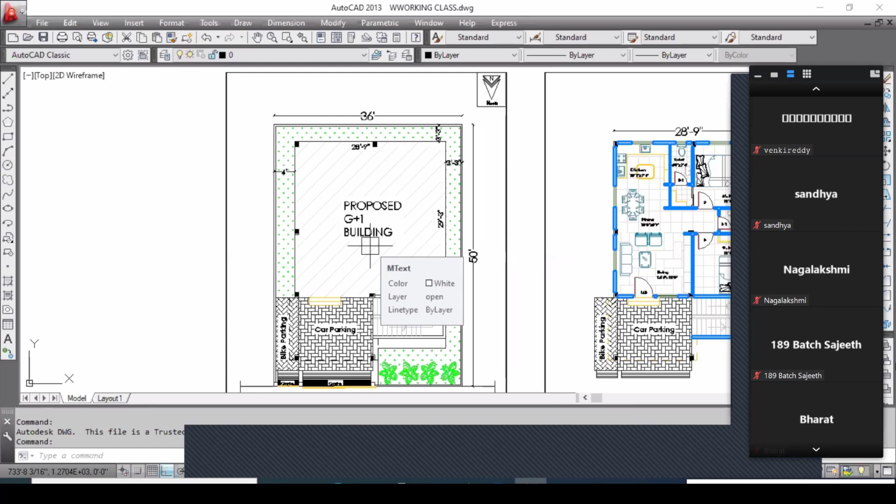That means how many floors, whether he wants parking or not, how many bedrooms he wants, whether the ground floor should be parking, or half the floor constructed as a single room, or half the portion covered with parking or something. We have to collect all this data from the client first, and then decide the setbacks.

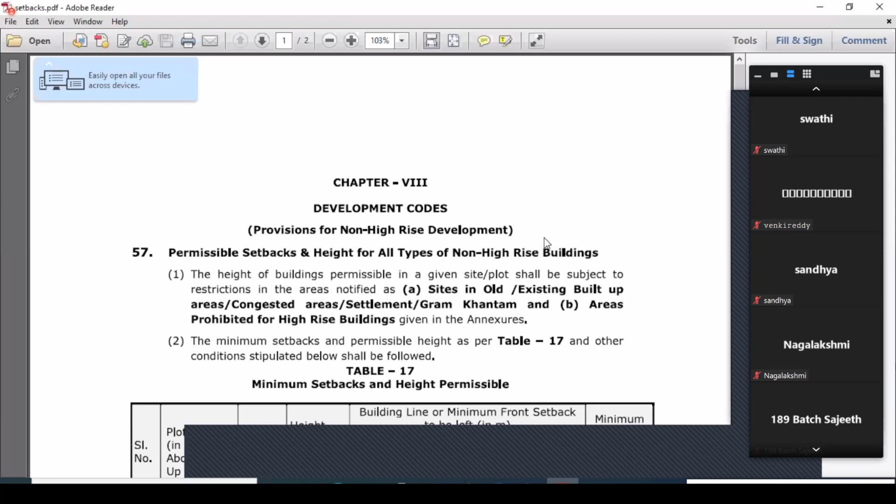I will share something—this is the architectural plan actually. As per our GO119, these are the setbacks, guys. All these units are in meter square. First of all, we all know all working drawings are done in square yards.

Our client easily says he has 250 square yards of his site, or he simply says I have 30 by 40 of site, or 30 by 60, or I have 400 square yards of area. That's it. He wants, and he will tell how many floors he wants - 2 floors or 3 floors, it may be.

These are the government rules, guys. Don't get confused. These rules only come in meter square. First of all, when we take the area, we have to convert it into meter square, when he will go for approval in GVMC circle or any other municipality. These are the areas, guys.

First of all, this is less than 50 square meters. Up to this we can construct - this is the permissible building height - up to 7 meter height only, including the parapet wall. Otherwise we can simply say 3.5 per floor height, we can imagine like that. And this is 50 to 100 square meters of area, we can construct up to 10 meters.

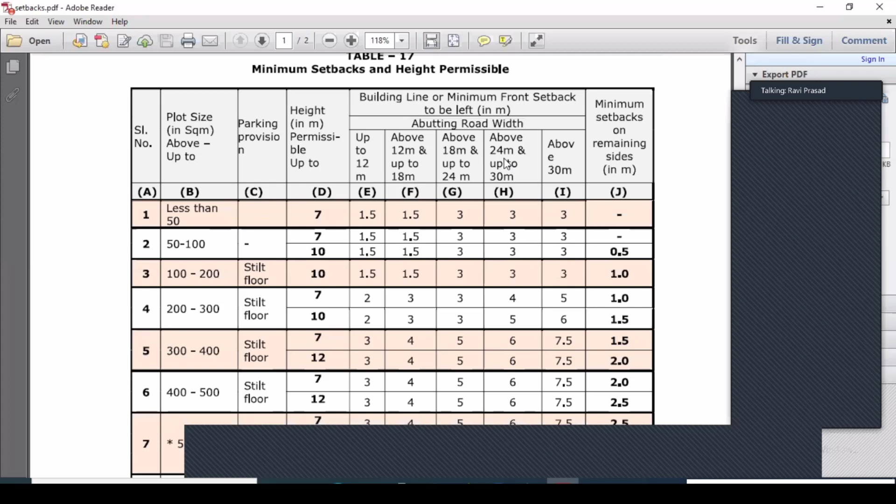These are the road widths, guys - up to 12 meters, or 12 to 18 meters, and 18 to 24, and above all. These are the surrounding setbacks, that means side setbacks.

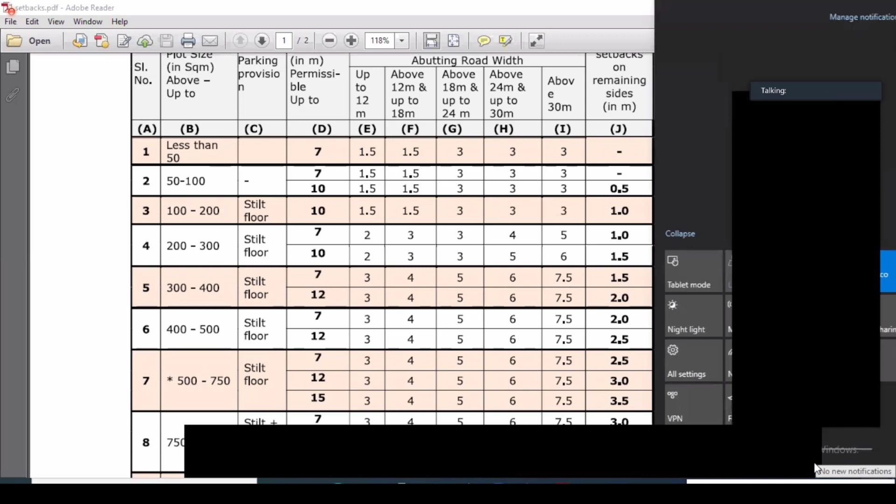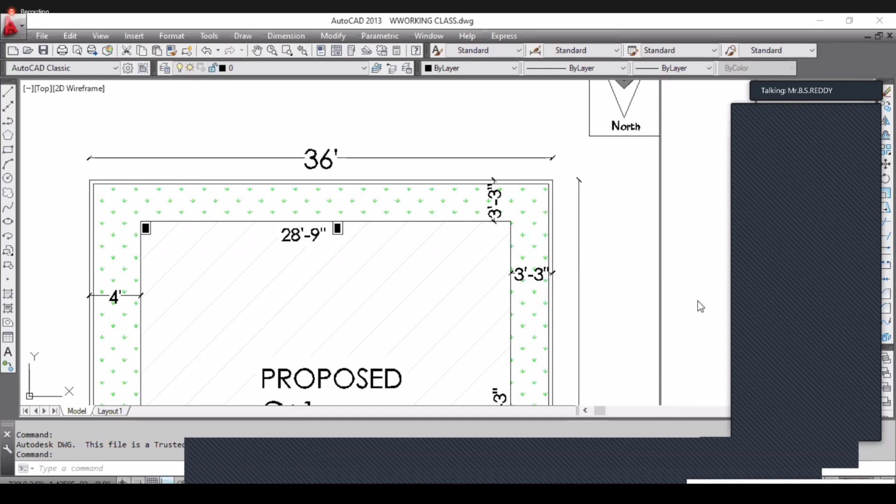I think we are seeing some shadows on that screen. Can you reshare it? Just click stop sharing, then share again. Is it clear now? Still I am seeing that. I don't know why it's happening. Did you open something? Nothing, I only opened the AutoCAD software and this Zoom meeting app. Whenever you click screen sharing, you can see the entire screen option, just check it. I'm already using that. Just share it. I think... I don't know why it is. Anyway, you can go ahead. Thank you, yeah.

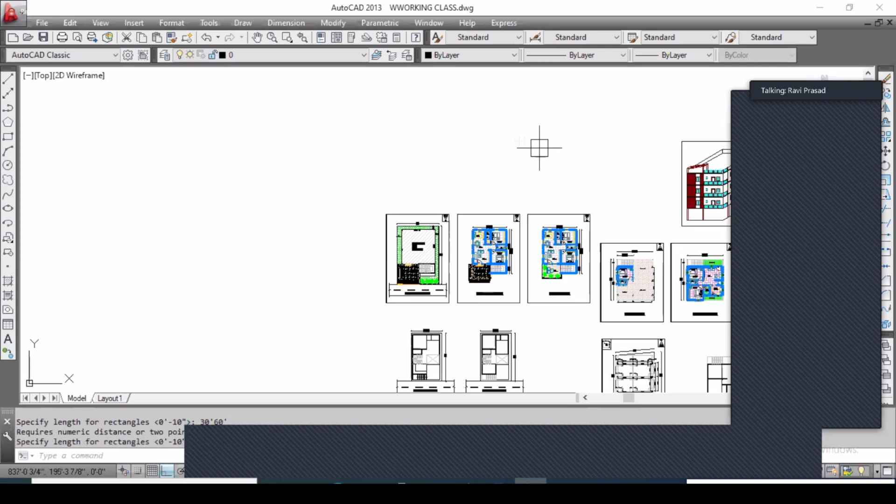Now we are coming for the working drawing. As per the client, we want a double bedroom house. That's it, and he said he wants car parking or something. First of all, I want to tell you all about Vastu. I have a site of 30 feet by 60 feet, I am drawing it here. And he said it is north facing, and he has a road width of 9 meters or something.

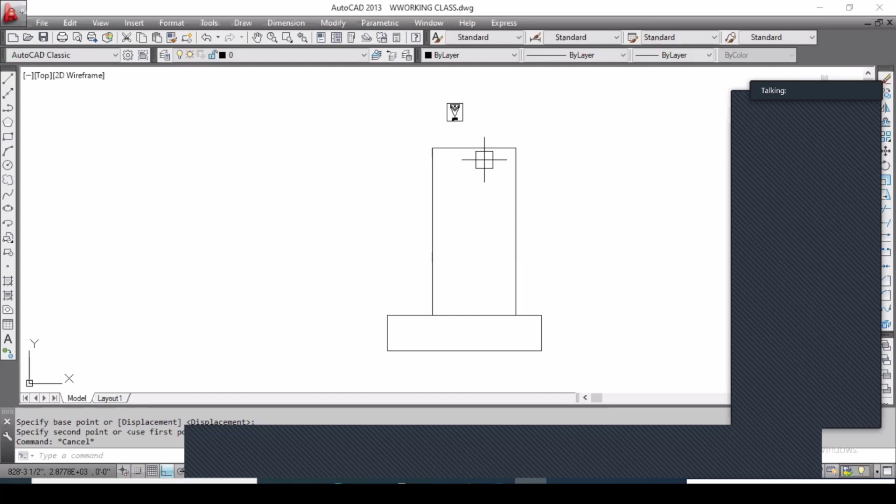Now, first of all, what we have to do is take the requirements of the client - how much he wants. If he wants double bedroom or single bedroom, or otherwise wants an apartment, that means group house, which includes area of each flat of 700 square feet, or 800, up to 1250 or 1300. It depends on the site area, or on the slab. So first of all we will ask the client what he wants to do.

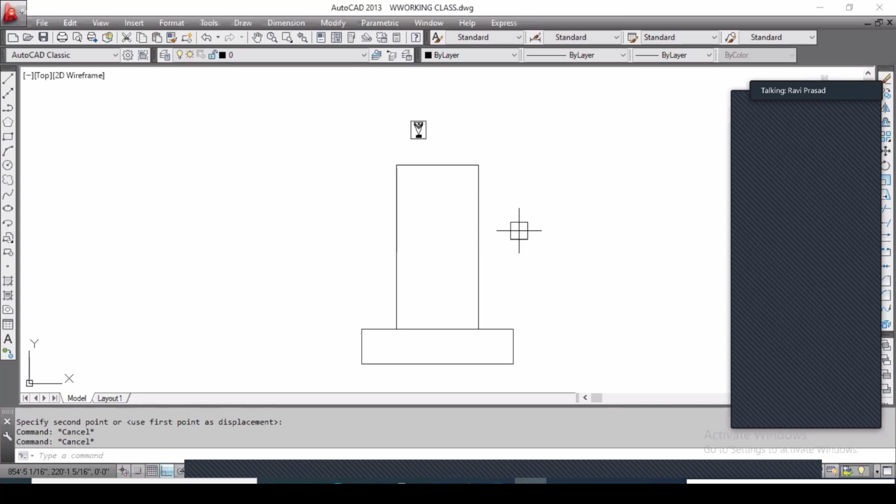He wants to go for plan approval or not. If he wants plan approval, we will take the setbacks as per GO 119, convert into feet, and draw this in the drawing. Otherwise, we ask the client if he wants a deviation. Deviation means, for example, if the site comes under 1800 SFT, I convert into meter square - it comes to 167.28 meter square.

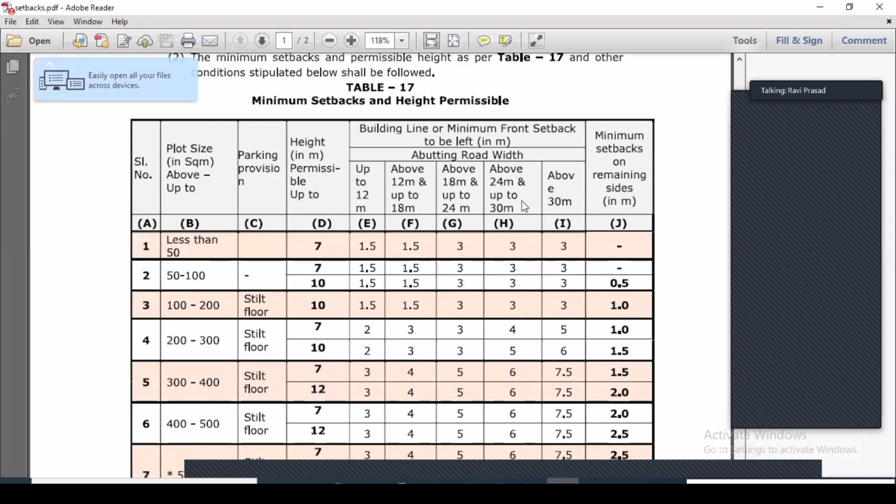As per our norms, if the client wants to take the working plan same as the approval plan, then we take 100 to 200. Our site comes under 167 square meters, so it comes under the third category, that means 100 to 200. We can give stilt floor as parking, the permissible height of our building is 10 meters, and the front setback should be 1.5.

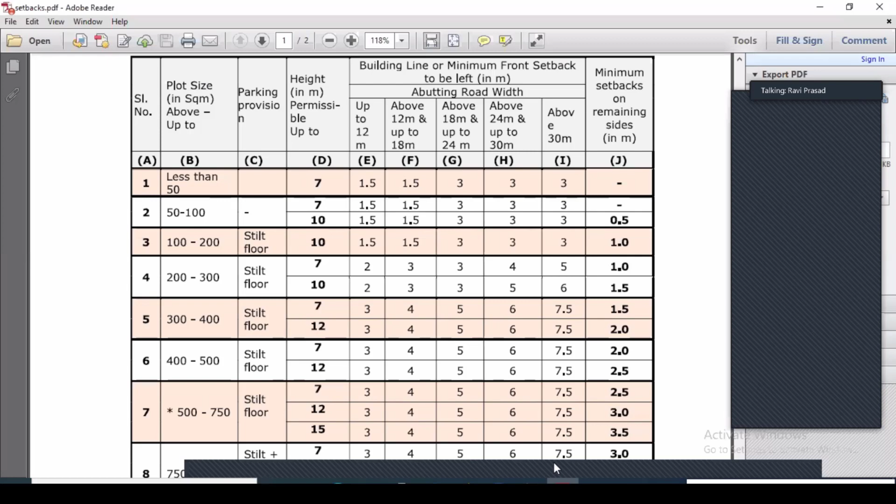It should be 1.5 or more, it can't be less than 1.5. When the road width is up to 12 meters, that means up to 40 feet, the surrounding setback is 1 meter, that means 3 feet 3 inches when we convert into the architectural drawing. These are the minimum. When the client says the same plan he's going for approval and the working plan should be same as he wants, then we will simply do like this.

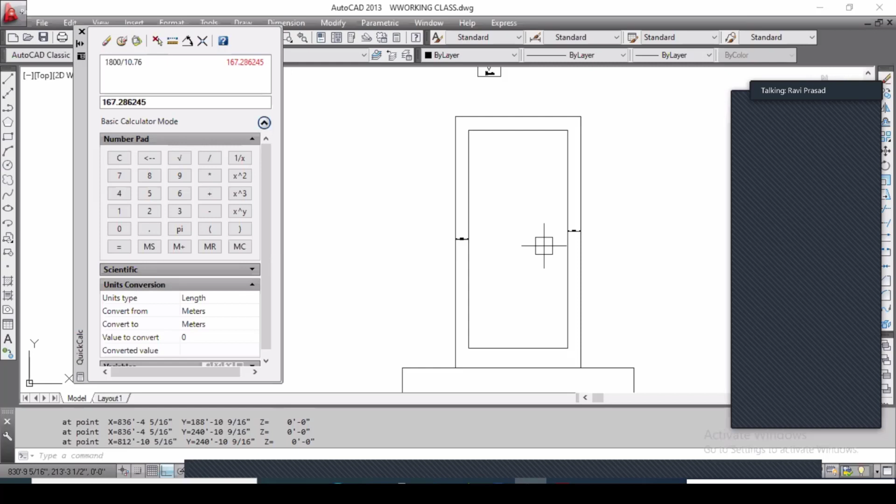One more thing is, then we will go for the slab width, how much slab area we got after the setbacks. So here I got 1200 SFT. Say it as 1200 SFT. So what we can get from the 1200 SFT, that means we can get double bedroom or triple bedroom as per the width that we get from here after the setback conversion.

Now these are the client requirements, these are the first points we have to take. When a client comes to us and asks for a plan, these are the tips or points we ask from the client. I already told you the road width, the sizes of the plot, the facing of the road, the facing of the plot, how much height you want, that means how many floors, and parking or not. That's it. Now we are going for the Vastu.

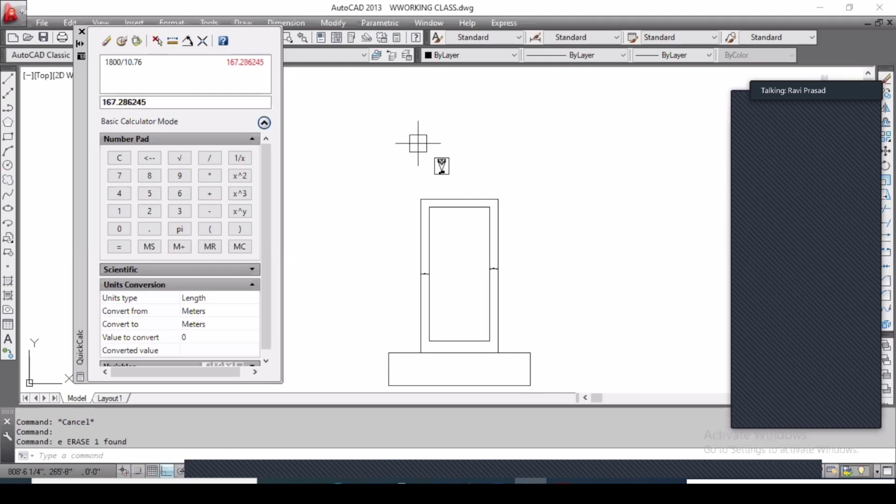This is the north one, and this is the south, and this is the east, and this is the west. At the west I provide 3 feet 3 inches, right? As per Vastu, when we are going for the working drawing, the east setback should be more than 3 feet 3 inches, that means it may be 4 feet. We can provide 4 feet, otherwise if we want more slab, then we will provide 3 feet 6 inches.

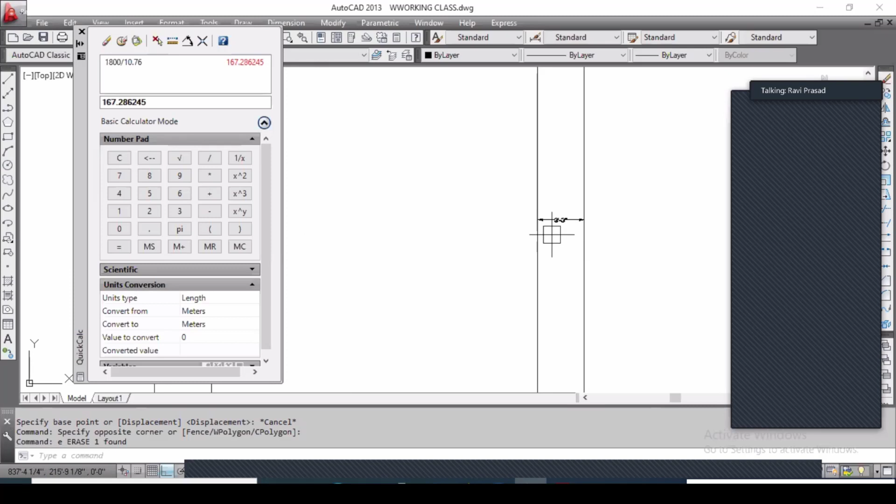Otherwise 3 feet, otherwise we will decrease this one as 3 feet or 2 feet as per our requirement, and we will increase this side more than that side. And the second thing, north one and south one: the north setback should be more than the south setback. When we provide 3 feet as the south setback, we have to provide more than 3 feet for the north setback. As per the rule, we are providing 3 feet 3 inches for the south setback.

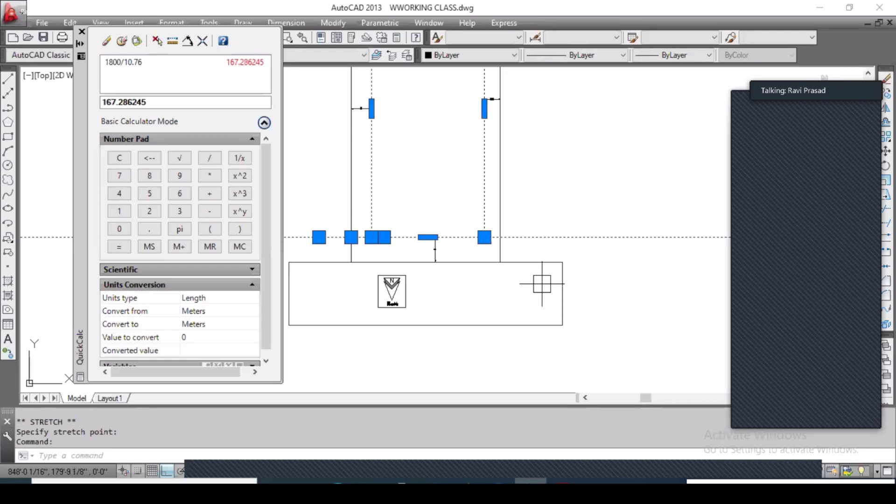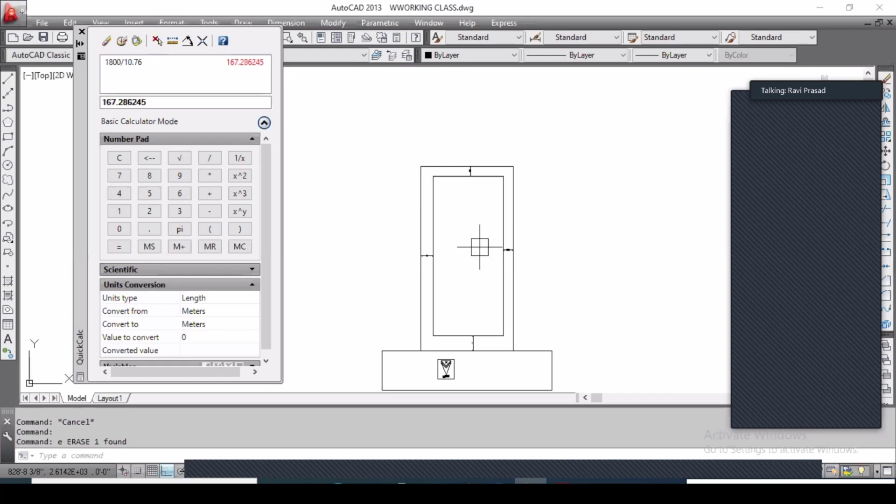So as per Vastu, we have to provide more than 3 feet 3 inches at north. So as per setbacks, I provide here 5 feet, that means it satisfies the Vastu, at the same time the requirement of GO number 119, right guys? So these are the Vastu tips. So now the setbacks, what we are providing on the sides, it's over. As per Vastu, we have to provide more width on both sides, that's it. The south setback should be less than north, and the west setback should be less than east.

That's it. Now when we are going for the staircases, we have 4 things, guys. When we have a north facing side, we are providing a staircase, we have to provide a staircase at the northwest corner, otherwise southeast corner, or southwest corner. The southwest corner is mostly preferable when we have roads on both sides, otherwise it's not that good. We mostly provide the northwest corner for a staircase when our site is facing north. While this is for the north side.

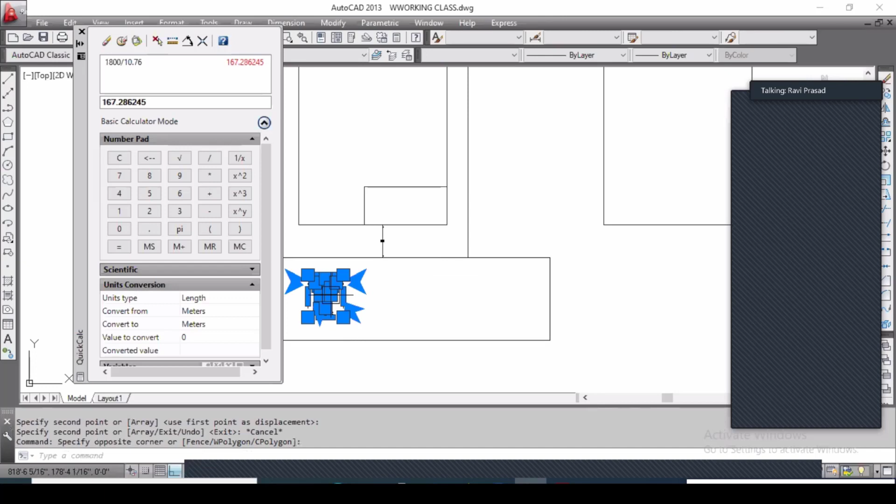While for the south one, if I take it as south, this is south and north and east and west. Now the staircase should be at southwest, at the northwest corner.

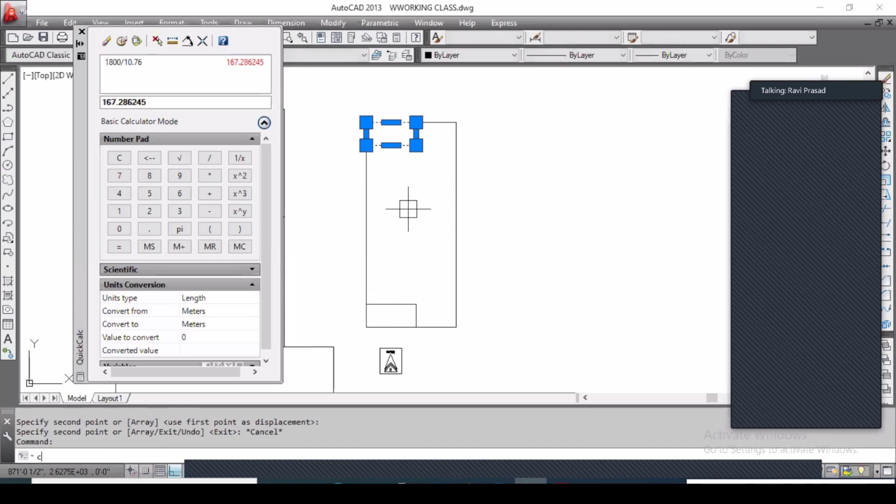Otherwise, we can simply provide at the southeast corner. These are the 3 places where we can provide our staircases. Otherwise, when we are constructing or giving a plan for an apartment or a group house, we simply provide the staircase at the middle of the 2 flats, and we'll separate both the flats like this. Okay, guys, these are the things.

At the same time, for the north, like this, if you're providing for the north, simply we will provide at the northwest corner at the center. Okay, guys, these are the 2 rules for the north and south.

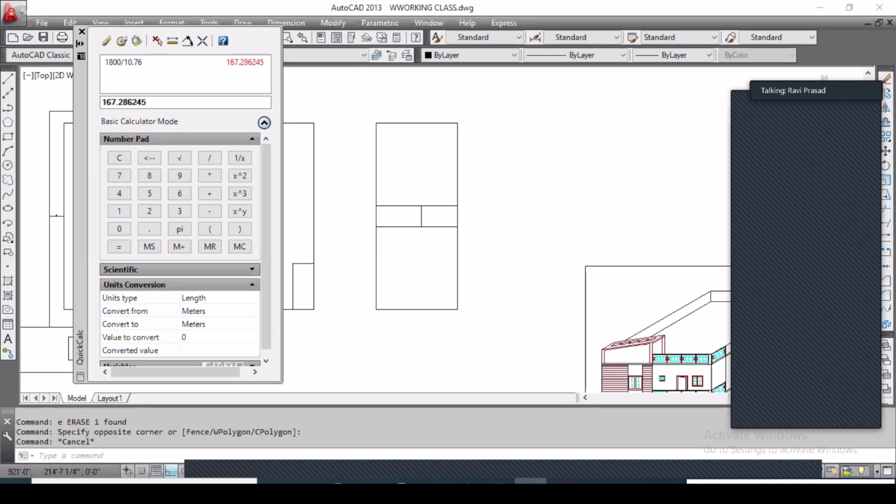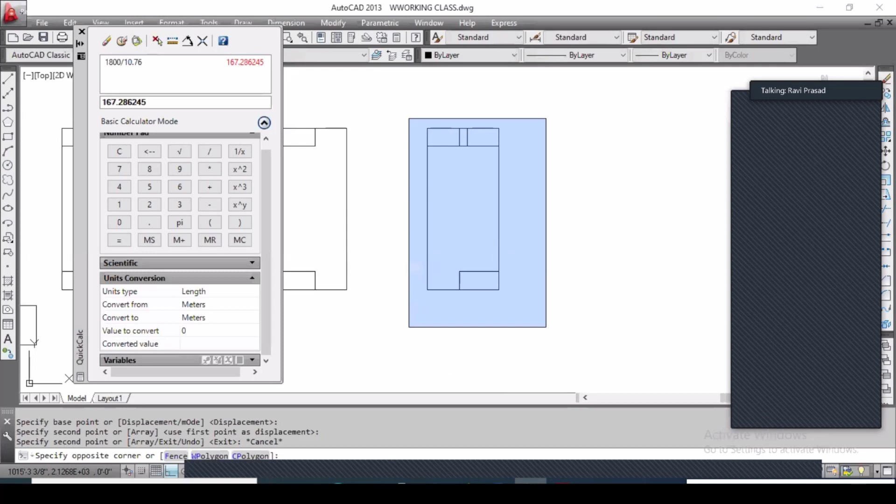Now we are going for the east. Same for the east, we'll simply provide at the southeast corner. That means southeast corner for the east, or southwest corner. And for the west, we'll simply provide at the northwest corner and southeast corner, or otherwise we can also provide at the southwest corner. That means where we want the facing or the entry for the living room.

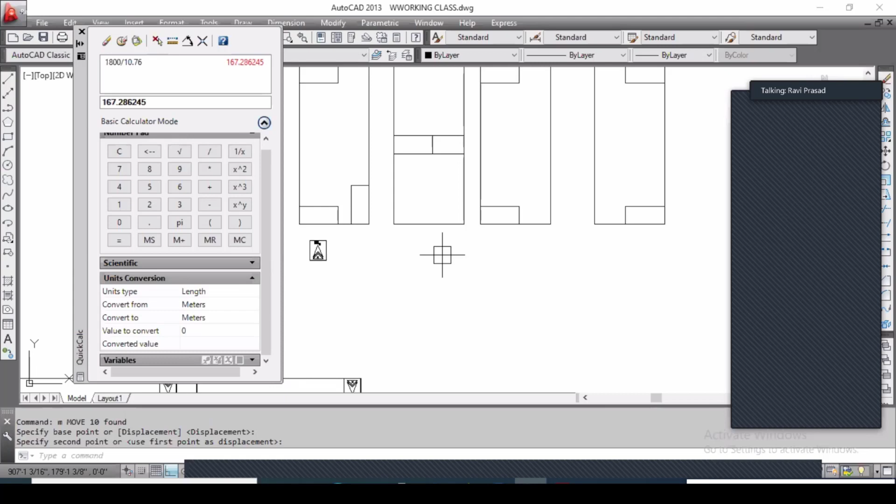Okay, now we are going for the bedroom design or kitchen or anything. So always we have to provide kitchen at the southeast corner as per Vastu. But as per BPT, we have to provide the kitchen at the northeast corner. But as per Vastu, we have to provide the kitchen at southwest corner, southeast corner and northwest corner, okay guys, like this.

Here I provide kitchen at the southeast corner. Otherwise, I have to provide it here, where the general bedroom is. Otherwise, I have to remove this general bedroom and provide the kitchen here as per Vastu.

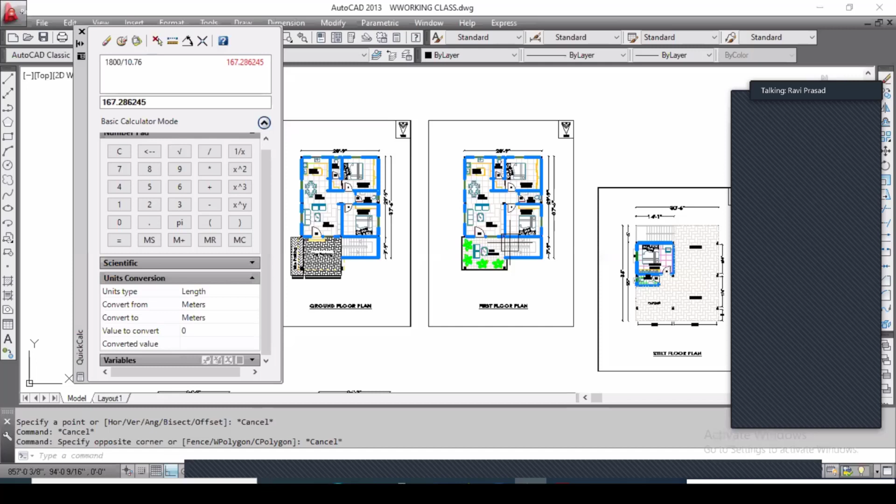So, as per Vastu, we have to provide kitchen at the southeast corner. Otherwise, the second option is the northwest corner. That's it. So for the master bedroom, we have to provide it at the southwest corner as per Vastu.

The other bedroom, where we should not provide is the southeast corner - that is called Agneyam in Telugu. So we should not provide the second bedroom or children's bedroom at the southeast corner. We can provide a children's bedroom at the northeast corner, otherwise northwest or southwest corner.

The toilet should be provided on the walls of the south wing and only west wing, most probably. Otherwise, we can go for the north wall also, but it should be at the northwest corner. That is as per Vastu. Okay guys, so these are the tips, or these are the basic principles as per Vastu.

Note down all of you, or otherwise all of you know. So now I already told you as per Vastu where we provide all these rooms or these portions or these toilets, where we recommended as per Vastu. Now I will tell you the minimum area we should provide for the rooms as per our building GO number 119, guys.

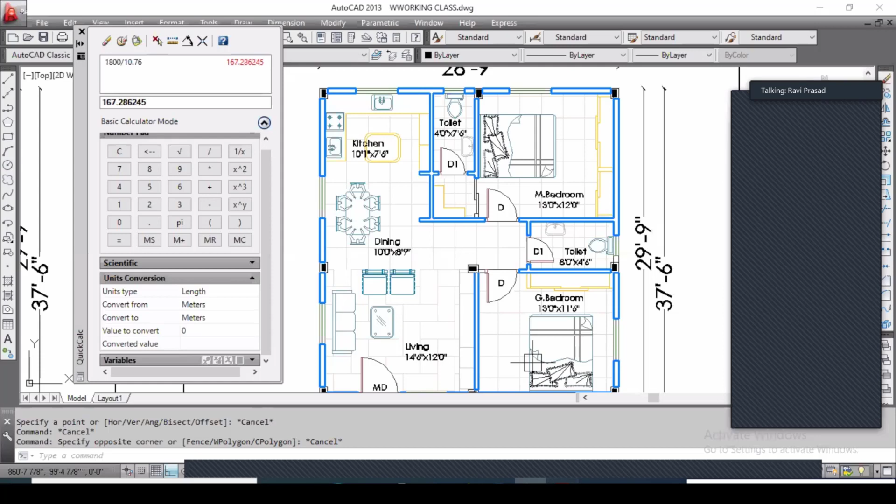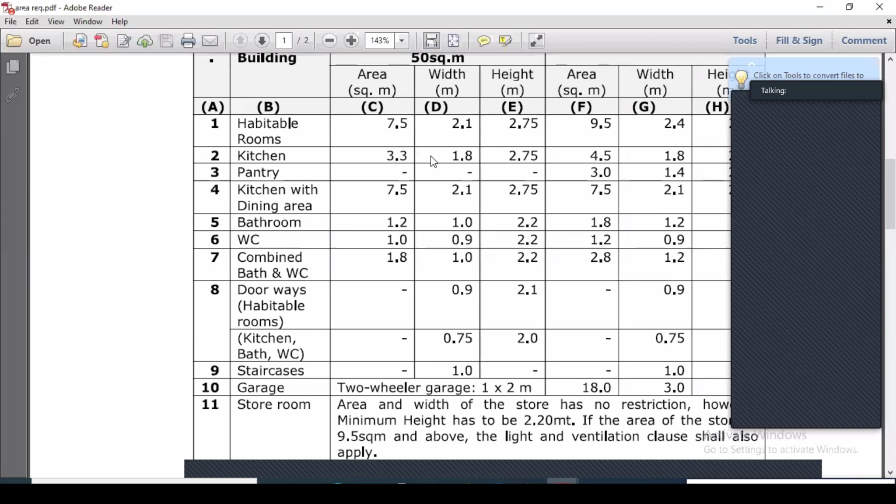These are the minimum sizes of rooms - habitable rooms. That means it comes under living room, bedroom, dining, and what we call the guest room or living hall - these are the habitable rooms. While the area of the dwelling unit - dwelling unit meaning it may be a flat or otherwise a room - that's it, that means a single floor. Here, dwelling unit means that one.

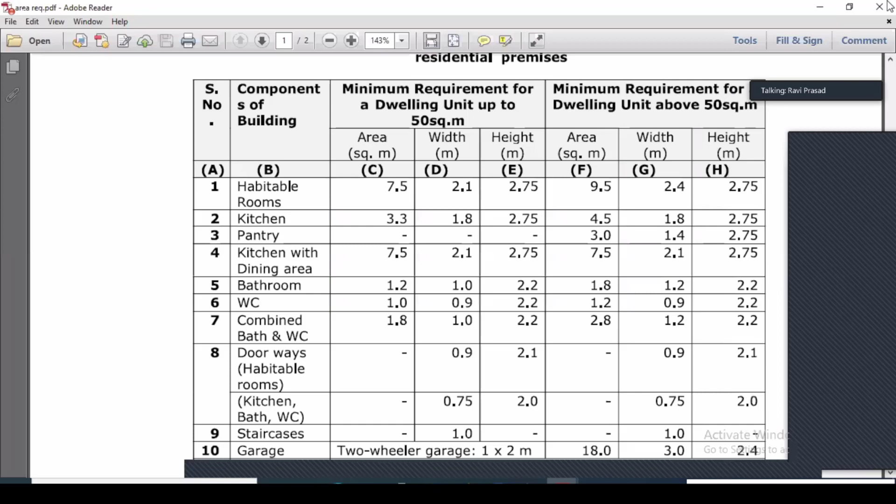Okay guys, and this dwelling unit is more than 50 square meters. Okay guys, these are the minimum areas: habitable rooms, kitchen and pantry, kitchen with dining area, bathroom, water closet, combined bath and water closet - that means toilet and doorways etc. Okay guys, these are as per the building code number 119. GO number 119 - these are the areas we should provide in our drawing for the approval.

So till now, does anybody have any doubts, guys, as per Vastu or building plans or areas, something? I want to know first.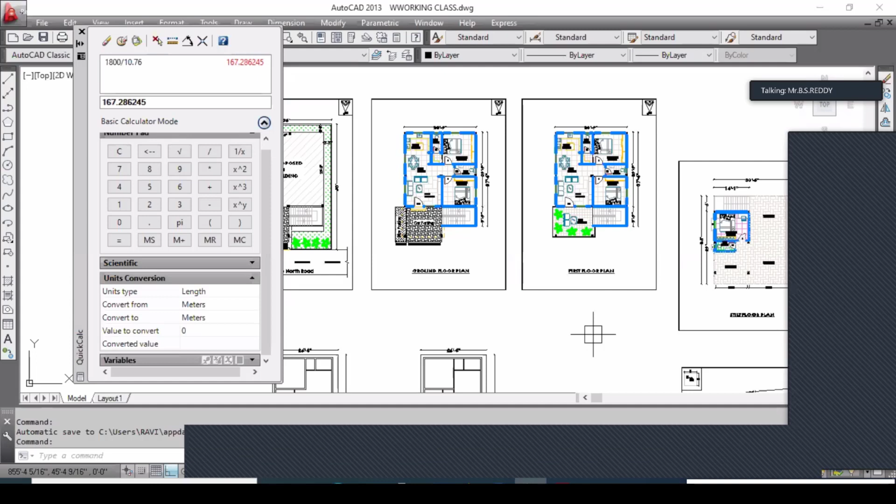Ravi, what's my small concern? Whenever we are talking about the discussion on Vastu, we get a lot of doubts. So it's better we keep it to the end. People having a lot of doubts need to clarify all those doubts, and if it is at the end of the session, we can conclude whatever topics we have. That's my small suggestion. Is it okay? But at the last, they may forget about the topic.

No, no one can forget it, you told everything clearly. Yeah, you can go ahead. Thank you. Okay guys, briefly I am saying it as tips, again as for the Vastu.

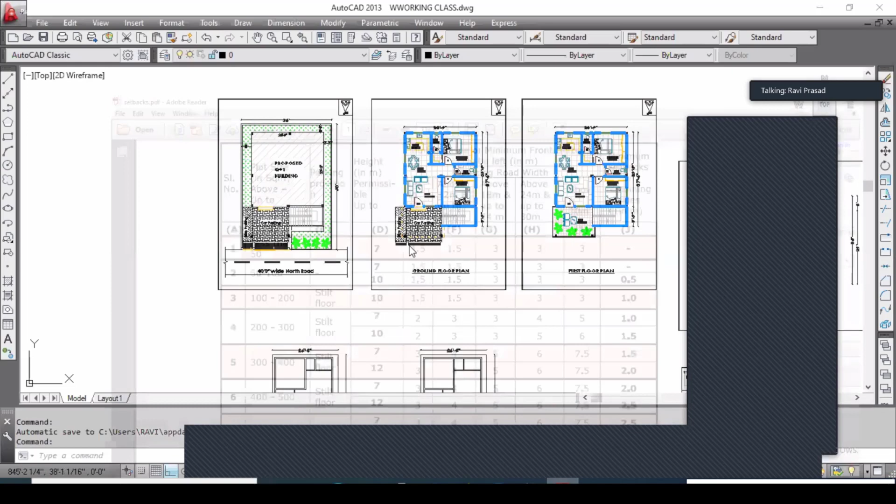As per GO number 119, I already told you what the area should be in meter square as per this PDF guys, and these are the minimum setbacks I already told you. So first of all, the client will go to the licensed surveyor or licensed engineer for his house approval, and he will share his documents. The licensed surveyor should verify the site, the road width, and the documents, and he will do the drawing. The drawings I will share, let me open it one second.

What is the minimum dimension required for the staircase? Nice question guys, so I will start with this. These are the building plans guys, hope you all can see, right?

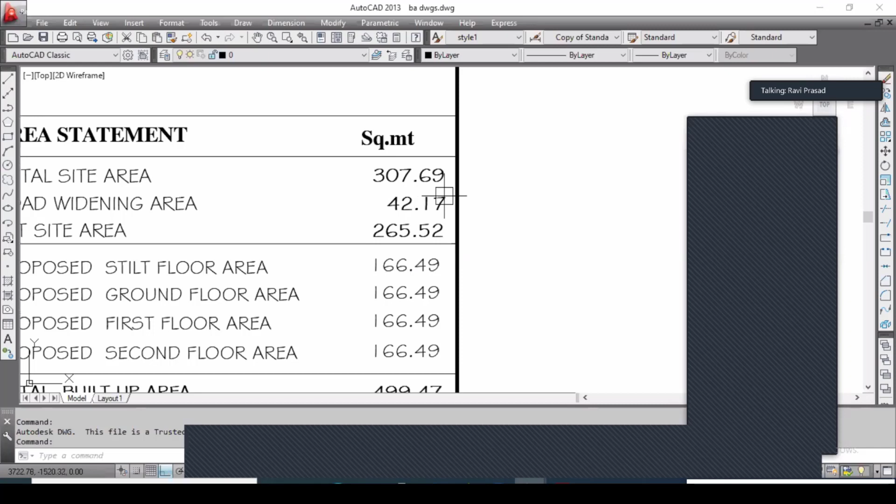Stilt floor. Here, first of all, I will start from the site plan. This is the site plan guys, so the area comes under 307.69, this comes under 300 to 400 square meters. Okay, here 300 to 400 square meters.

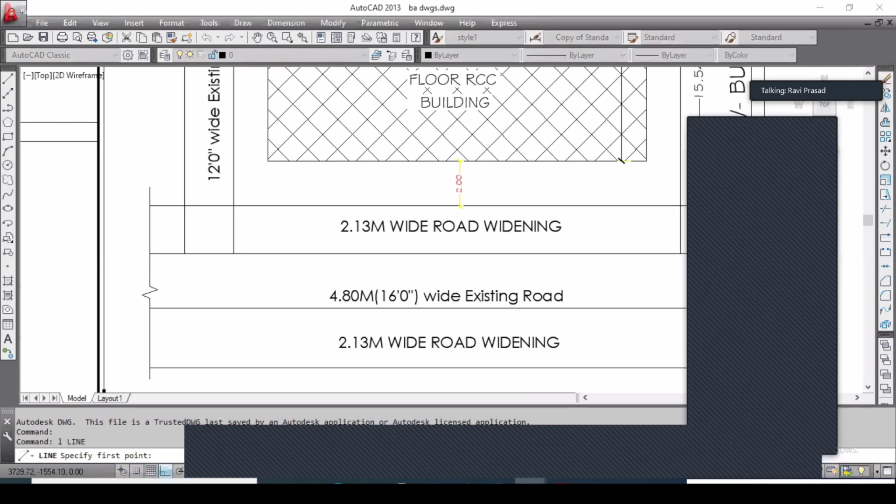And one main thing is, whenever we are going for the approval, the site abutting road should be more than 9 meters. Otherwise we have to provide 4.5 meters from center to center of the road. That means if it is a center, that means it has 16 feet of road, that means 4.8, so the remaining is 4.2. So I simply take it as 2.1 meters at both ends. Okay guys, this is called road widening.

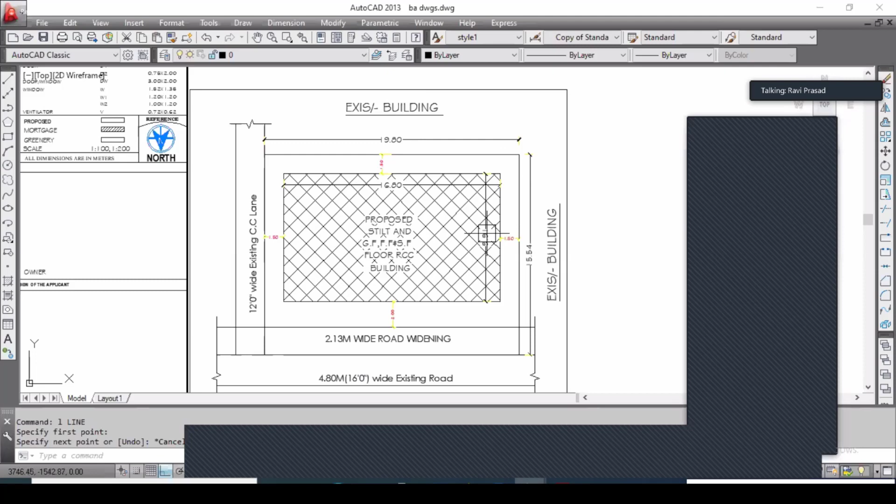We have to provide road widening in this kind of approval plans, which is not acceptable in the working drawings. We don't show this for the client in the working drawing, but in the approval drawing we have to show the road widening and abutting road width, and what is it at the side boundaries. That means it has an existing building at the west side and also at the south side. Okay guys, and these are the minimum requirements we show in this drawing, guys, in this site plan.

That means it is having 9.8 and 15.54 of site width. Okay, so here he is having a road of 4.8 meters, that's why we are showing 2.13 meters of road widening here. And after this, I am showing the area comes under 200 to 300 area. So the maximum height we can construct is 10 meters, front setback is 2 meters, and surrounding setback is 1.5 meters.

Okay guys, when we are going for 2 floors only, that means including stilt floor, we can go for a front setback of 2 meters, and all-round setback is 1 meter.

That means we don't need to provide 1.5 meter setbacks for a height suitable for a 2 floor building. While we are constructing, we are going for approval of a 3 floor building. Then only, then also, we can go for a 1.5 meter all round setback.

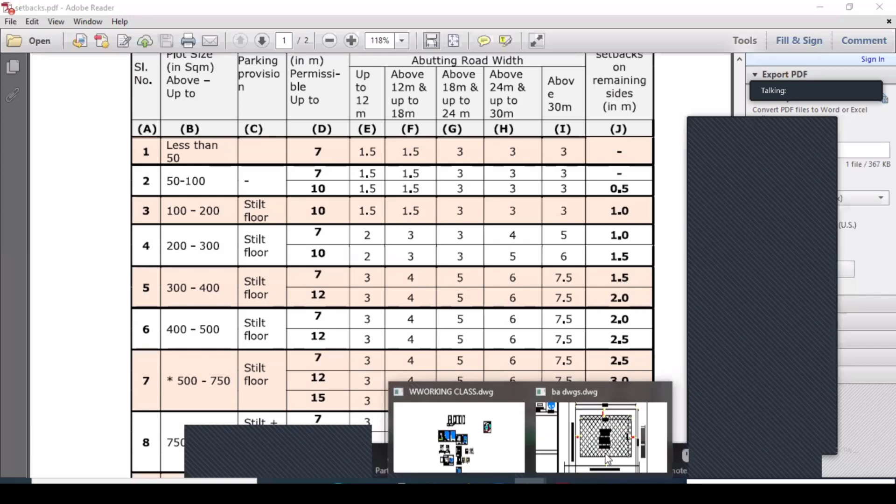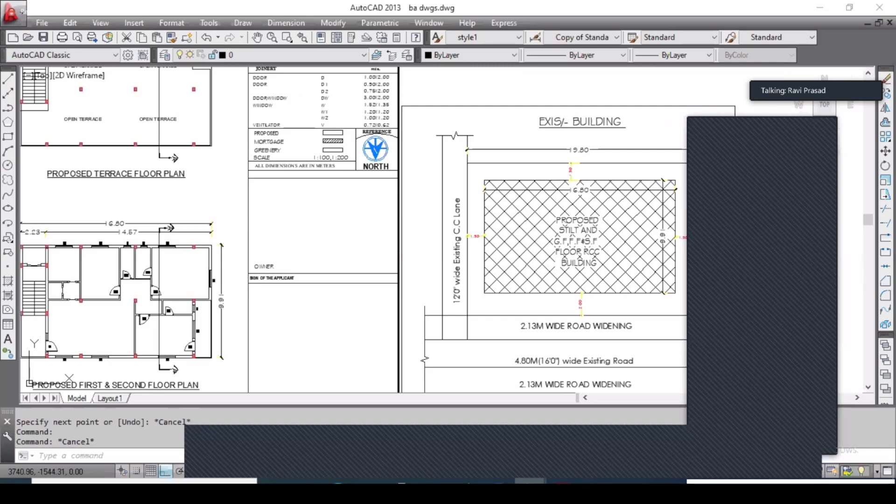Okay guys, so now this is the site plan, having a slab width of 6.8 and 9.91 dimensions. The client requirement is he wants to construct a G+2 floor building, that means including stilt floor. So simply I can write it as proposed stilt and GF, first floor and second floor building. So here is the plan. He wants a lift also, so I simply constructed a midland lift for the client's requirement. So these are the drawings, guys.

So someone asked what is the minimum staircase width, right? So as per the GO, the minimum width for residential buildings, that means individual buildings, that is 1 meter. The single flight width, that means single flight width, should be 1 meter.

For an apartment building, that means when constructing 2 flats or 3 flats, instead of 1 meter, he has to provide 1.22 meters of width. So for individual buildings, the staircase flight width should be 1 meter. For residential apartment buildings, the staircase flight width should be 1.2 meter, meaning both flight widths combined, the staircase width should be 2.4 meter. For commercial buildings, the staircase flight width should be 3 meters total, that means single flight width should be minimum 1.5 meter.

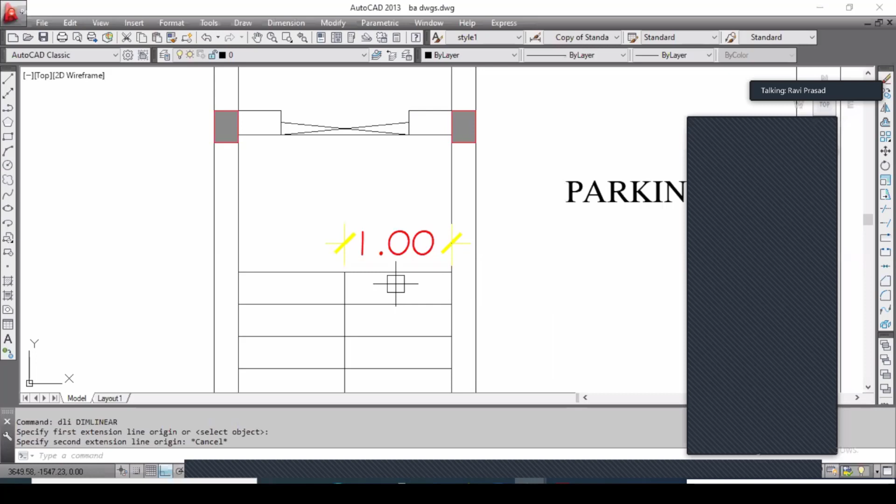Okay guys, and this is the parking, and this is the watchman room. And now this is the ground floor plan.

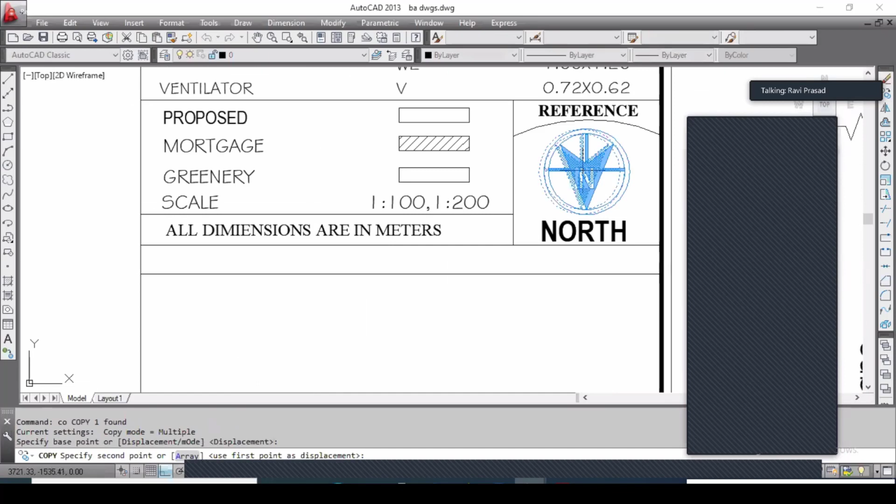This is the kitchen, guys. I didn't write letters here, but this is the kitchen. I will mark the arrows so you can simply understand. Okay, it is a north facing side, guys, north facing building.

So as I already told you, for the north facing side, I have to provide a staircase at the northwest corner, otherwise southeast corner or southwest corner. But most clients prefer northeast corner entry, whether it's north or south-east. So I prefer northeast corner entry, that means east entry. So here I provide south staircase and the lift at the southeast corner.

So these are the minimum requirements. And one more thing guys, while going for approval, the ventilation should be 10% of the internal dimensions of the room. That means here we have 5 meters and 4.5 meters, that is more than 22 square meters. For 22 square meters, the ventilation should be more than 10% of 22.5 meters, that means it should not be less than 2.25 square meters. Okay guys.

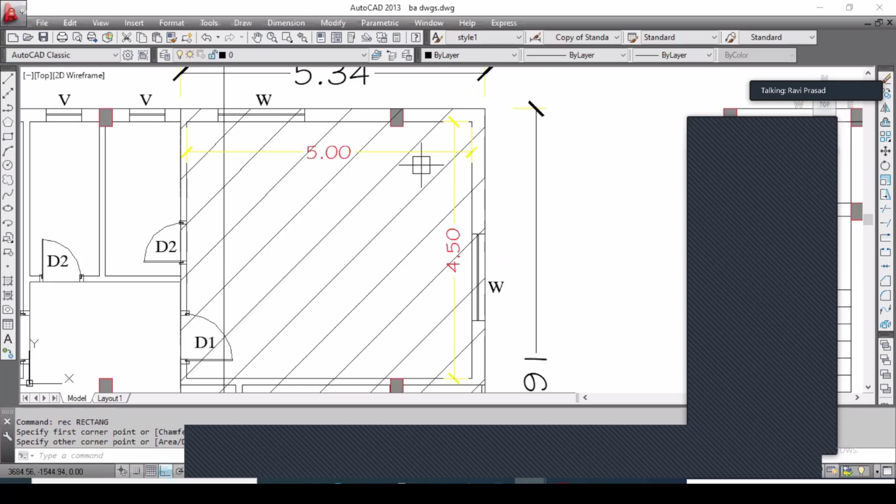So that much width of ventilator or window we have to provide for the bedrooms or any other rooms, we have to keep in mind. We have to keep it in mind while designing a room or going for a plan for approval. This is the thing, this is one thing we have to keep in mind, guys.

And these are the toilets, and this is the second floor and first floor. The total, that means these are the overall drawings we have to draw for approval, guys. That means we will draw floor plans, and these are the terrace plan. Okay, and elevation and section.

These are the minimal, these are the structural drawings. These are not required, but when we already go for a structural drawing, he will give some drawings, we can put it in here for our requirement.

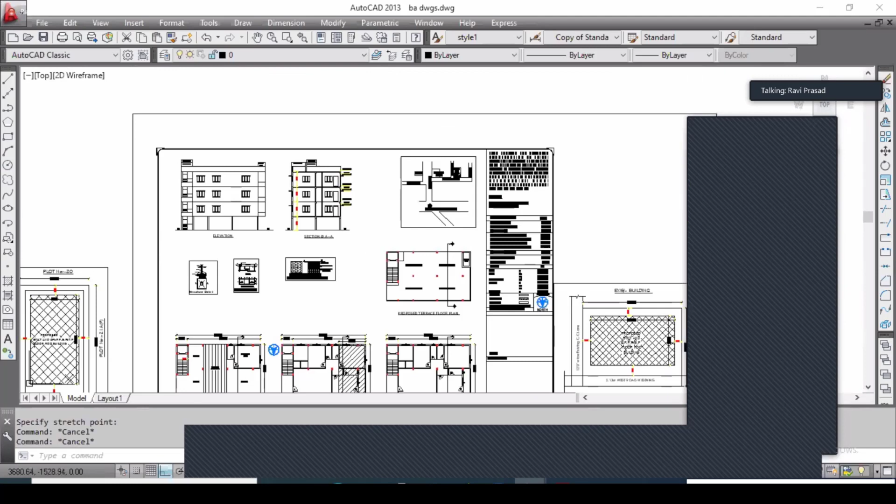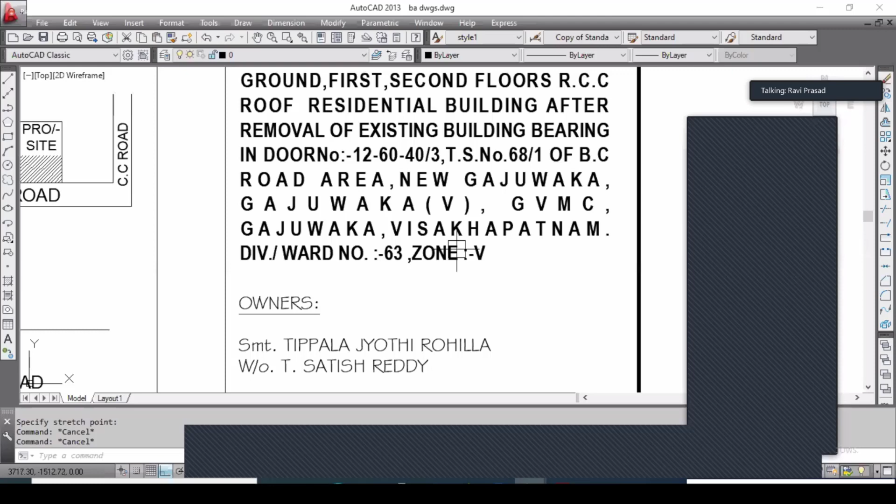And these are the location plan, and these are text, guys. That means where our building is, in which survey number, and in which ward and which zone, and what is the owner name, and what is the area we got.

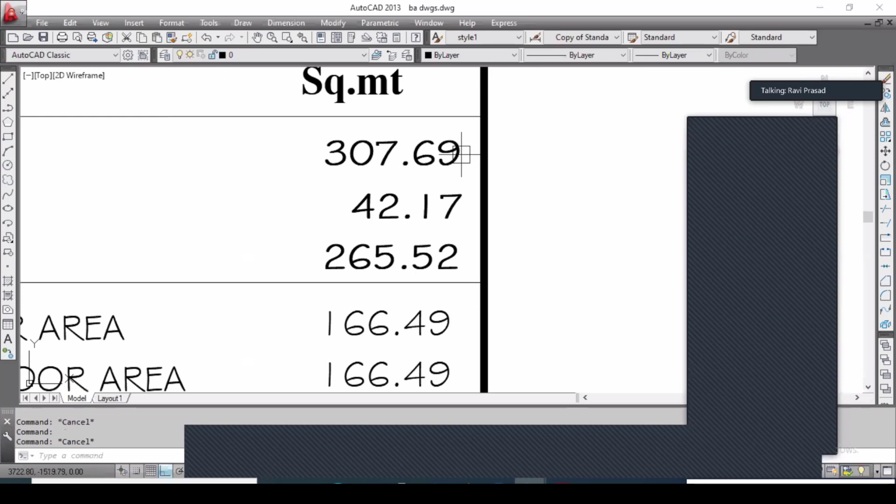So what is the total area, what is road widening area, what is net site area. Here guys, total site area means this is the total site area, guys, that means the overall site. And road widening area, that means 2.13 into the width of our site, 19.8 guys, this is the road widening width, road widening area. And when we subtract 42.17 with this area, we will get the net site area, that means this is the net site area, guys.

Okay, so after the setback relaxation, we will get this slab area, that means working area, this is the working area. How many floors? Here, one thing, guys.

As per the government GO, the government doesn't charge any cost for the stilt floor, meaning the parking floor. This is one thing we have to keep in mind. That's why when we go for a parking floor, we have to leave the whole floor for parking only. We do not construct any kind of structures in that parking floor. This is the reason the government does not charge for this whole slab area.

It doesn't charge any charges for that area. That's why the government does not accept any kind of structures in this parking area. Okay, guys.

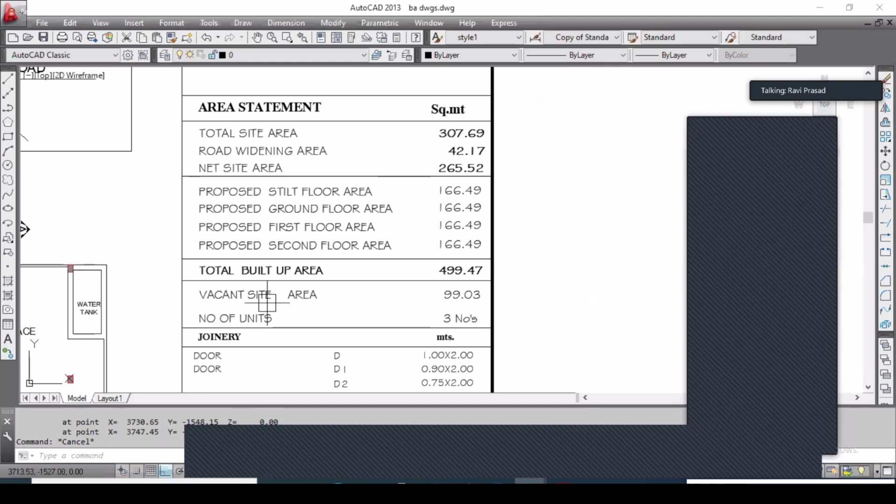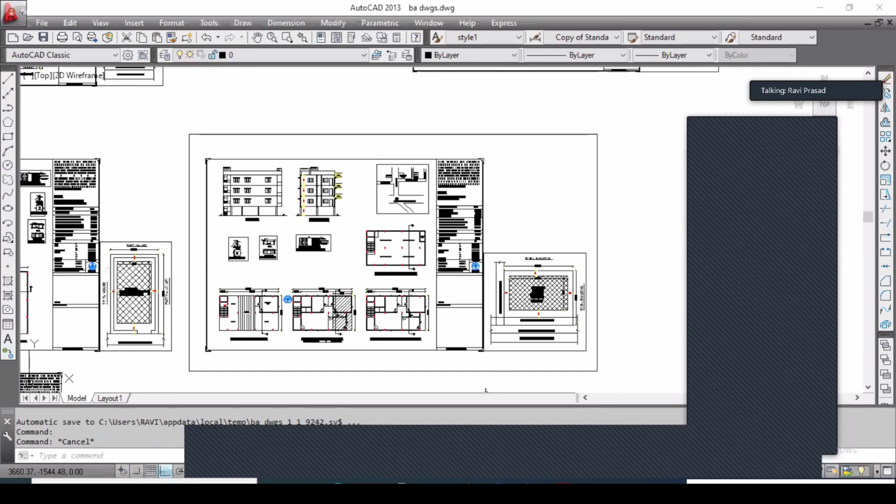That means vacant site area. This is simple, guys. We will subtract our working area or floor area from the site area to get the vacant site area, and the number of units means the number of floors. As I already told you, the stilt floor doesn't count as a floor. So this is ground plus first and second, and that's why I take it as 3 units.

Okay, guys, so these are the door requirements, meaning the legend, which in some other drawings is called details. Someone writes it as a list of details, etc. I note it as joinery, showing what doors and windows I used in this drawing.

And one more thing: mortgage. Some have the mortgage requirement. What does mortgage mean?

When the site is more than 200 square meters, the buyer or contractor should leave 10% of the area for the government. Simply, the client has to register this 10% area for the government until he constructs the whole plan as per this working drawing, meaning as per the approved plan.

When he doesn't construct as per the plan, this total area will be locked down and taken under the control of the government. He can't use it or sell this area. If he wants to sell this ground floor area, how much area can he sell?

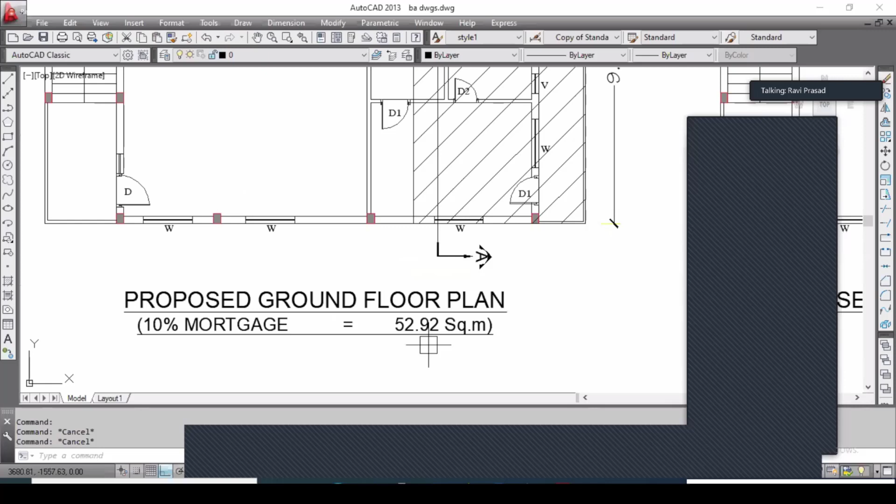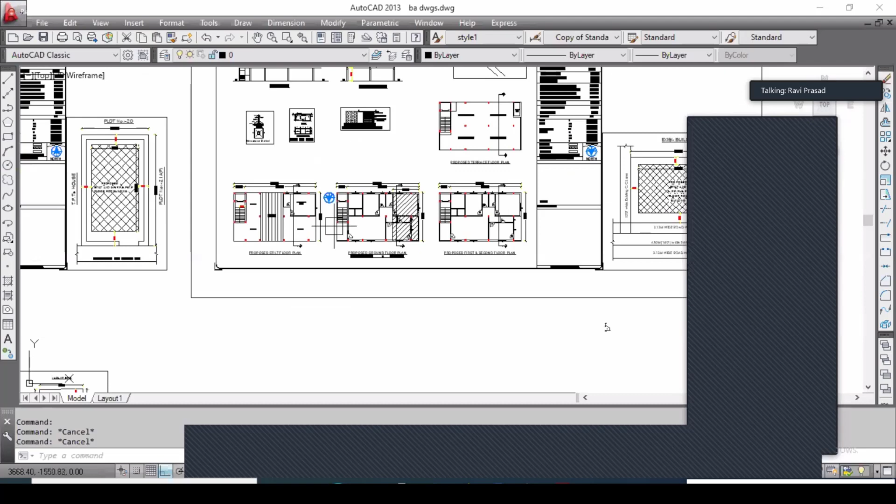162 square meters total, meaning only 110 square meters of area he can sell to another person. He can't sell the 52 square meters, that is the 10% area. Registration can't be done for that portion. Only after the client constructs everything as per this plan can the government give back this 10% area, along with an NOC letter from the government, and only then can he sell this 10% area to another client or party.

Okay guys, so these are the plans. I am showing another one. This is also a stilt G+3 building.

One more important thing, guys: a 4.5 meter wide driveway. While constructing a parking floor, we should leave a 4.5 meter clear width for vehicle movement, for the entry or exit of vehicles. These are the main things we have to provide as per the drawing, meaning as per the rules.

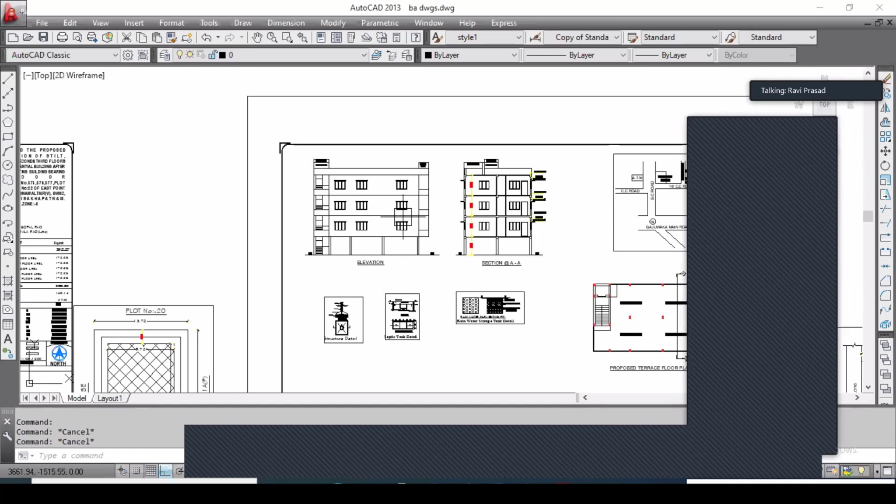And the height: what is the height of the building? As I already told you, I can't construct more than 10 meters, so I take it as 3 meters for each floor. Here my building height is 9 meters only, because the stilt floor can't be counted as a floor. That means the 2.75 meters of the stilt floor is not counted in the height of the building.

That's it, guys, these are the building plans. I will show you one more thing: this is also a G+1 building, ground floor and first floor. Everything is the same, guys. What we have to provide in this drawing is simply the site plan, floor plans, location plan, section, elevation, and the title box.

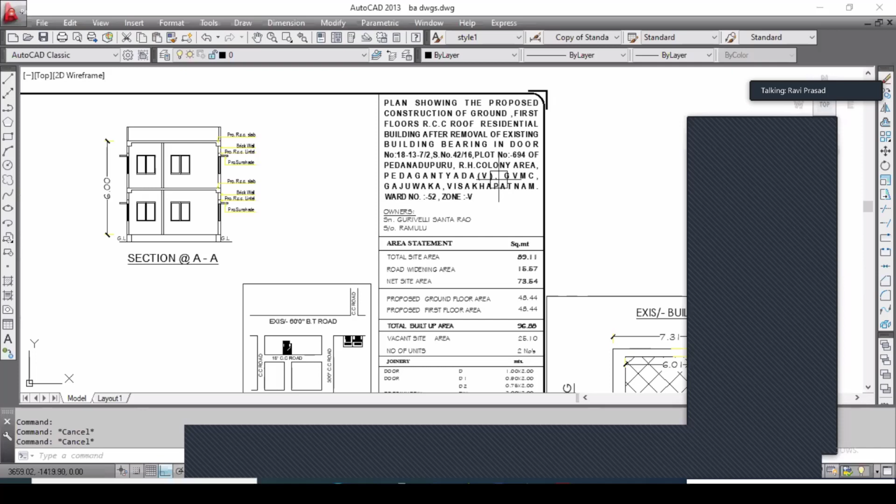In this title block, we write how many floors we are constructing, which area, which door number, which survey number, plot number if any, which ward number, which zone it comes under, the owner name, and the area details. That means list of doors and windows we use, their sizes, and the scales used in this drawing.

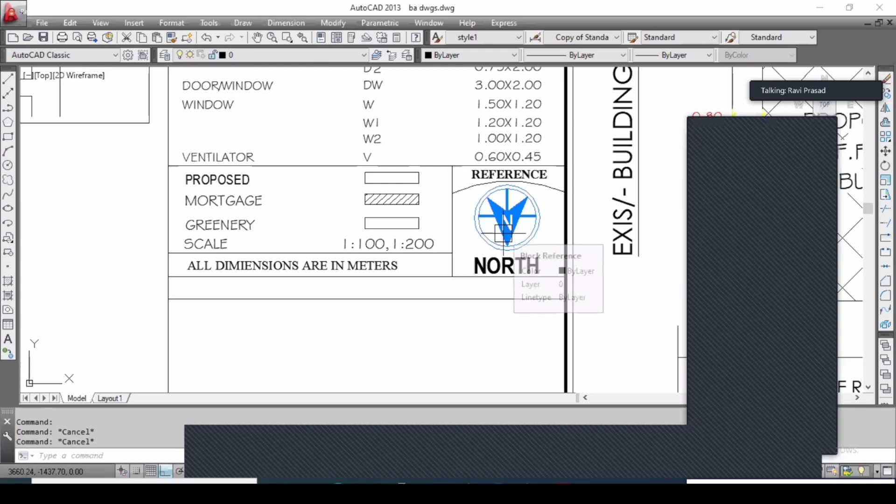These are the north direction, and in which direction the site abutting road faces. These are the minimum requirements of the plan while going for approval, and the minimum details we should draw in this drawing for approval.

The licensed surveyor or licensed engineer will draw a plan like this and submit it to the higher authority, the building inspector or ward planner. He will get the plan approved, and only after approval can he go for construction. Otherwise, the building inspector may dismantle the building if there is deviation.

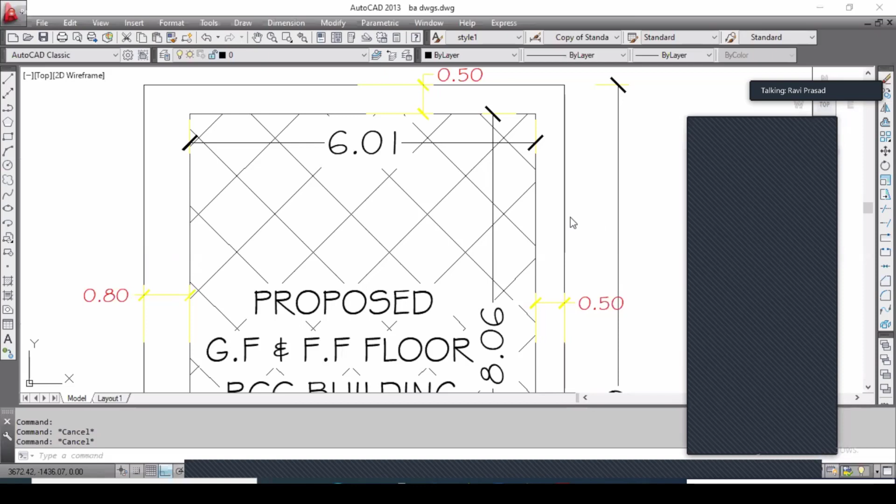Now let me explain deviation. Say I am constructing and taking a width of 0.5 meters in the plan, but on ground I am actually having a width of 0.3 meters. That means this 0.2 meters difference in width is called deviation.

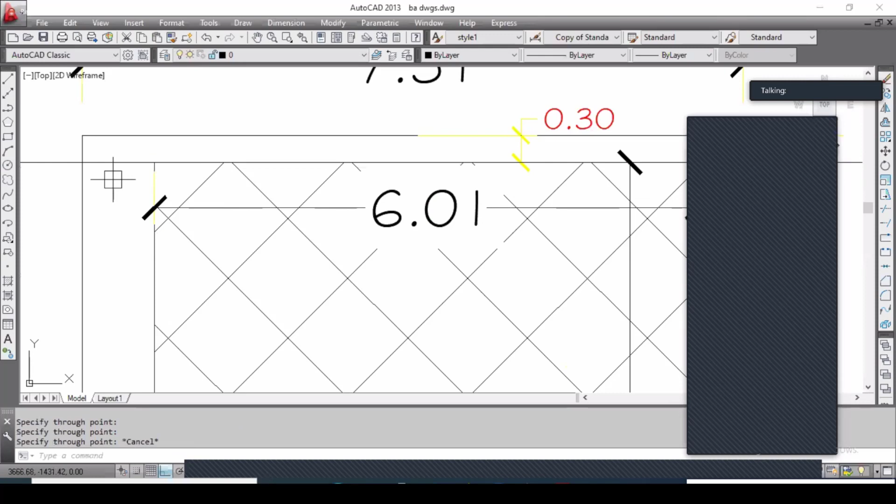For this deviation, the building inspector or ward planner can come and easily dismantle that portion, because we showed our setback as 0.5 in the plan but constructed only 0.3. So he has the right to dismantle it. This 0.2 meters of width is what we call deviation.

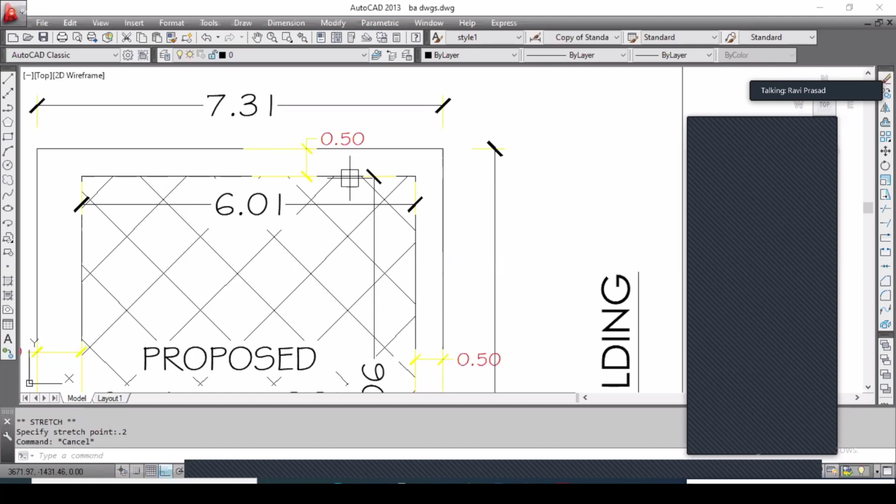For this deviation, we have a lot of GOs, methods, processes, or schemes. The simplest one is the building regularization scheme, developed and provided by the government. Under that scheme only can we get approval for this 0.2 meters width deviation. Otherwise, from the start of construction to the end, whenever the inspector wants to dismantle that 0.2 width, he can do so.

Does anybody have any doubts, guys?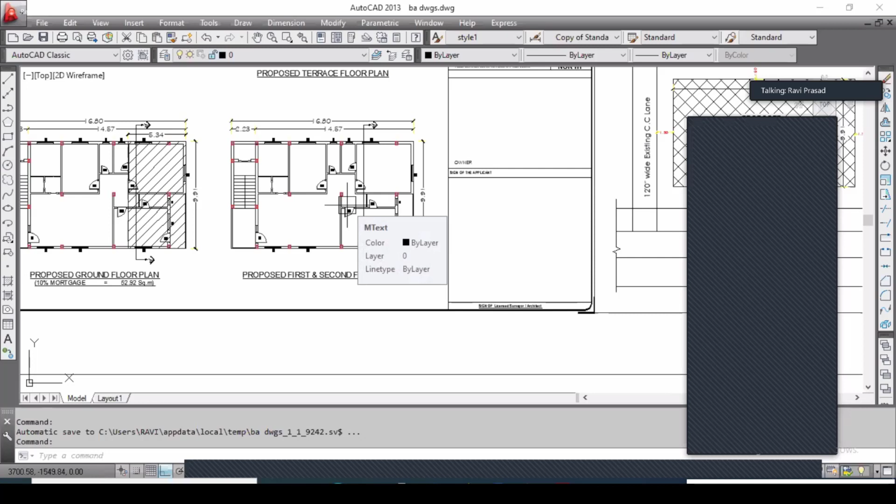సింపుల్ గా చెప్తున్నాను. ఇప్పుడు ఇదే అపార్ట్మెంట్ అనుకోండి, లేదంటే నాకు 4 brothers ఉన్నారు, 4th floor నీడెడ్, నేను ఇంకో ఫ్లోర్ వేయాలంటే కన్ఫర్మ్ గా టీడీఆర్ కొనుక్కోవాలి. టీడీఆర్ కొనుక్కుంటేనే యాజ్ పర్ అప్రూవల్ ప్రకారం అది అప్రూవ్ అవుతుంది. టీడీఆర్ లేదనుకోండి, నేను కట్టడానికి లేదు, అనాథరైజ్డ్ గా కట్టాలి. అనాథరైజ్డ్ గా కట్టితే వాళ్ళకి రైట్ ఉంటుంది, ఎప్పుడైనా వచ్చి వాళ్ళు డిస్మాంటిల్ చేసేవచ్చు.

అంతే, ఇదే టీడీఆర్ అంటే. ఇంకో డౌట్ ఏంటంటే, ఇప్పుడు కొన్ని అపార్ట్మెంట్స్ కి మేము చూసేది ఏంటంటే వాళ్ళకి ఒక 500 square yards స్థలం ఉంటది, వాళ్ళకి 5 floors కి వాళ్ళ పర్మిషన్ వస్తుంది, యాజ్ యూజువల్ యాజ్ నార్మల్ సెట్ బ్యాక్స్ ప్రకారం పర్మిషన్ వస్తుంది. కానీ వాళ్ళు కూడా ఒక టీడీఆర్ అనేది పెట్టుకుంటారు 5th floor కి, అంత అవసరం ఏముంది అనేది ఒక డౌట్.

టీడీఆర్ కి ఎంత అన్నారు మీరు? ఒక 500 square yards ఉంటుంది. ఇప్పుడు 500 square yards ని కన్వర్ట్ చేస్తే 400 to 500 దాంట్లోకి వస్తుంది. దాని హైట్ ఎంత వరకు? 12 meters వరకు. పర్మిసిబుల్ హైట్ 12 meters, అంటే ఎన్ని ఫ్లోర్స్? 4 floors. అక్కడ మీరు చూసుంటే కరెక్ట్ గా గమనించండి, వాడు అక్కడ ఎక్స్ట్రా ఫ్లోర్ వేస్తాడు, అంటే 4th floor కూడా ఉంటుంది వాడికి.

ఆ 4th floor ఎలా వేసాడంటే ఇలా టీడీఆర్ కొని వేస్తాడు. అదేవిధంగా గ్రౌండ్ 1st, 2nd, 3rd వేసేస్తాడు. 4 ఫ్లోర్లు కదా, గ్రౌండ్ 1st, 2nd, 3rd వేసేస్తాడు. వాడు మళ్ళీ 4th floor వేసుకోవాలిగా, వాడు అమ్ముకోవాలిగా, అందుకని టీడీఆర్ తీసుకుంటారు.

ఎనీవన్ గైస్, ఎవరికైనా డౌట్స్ ఉన్నాయండి?

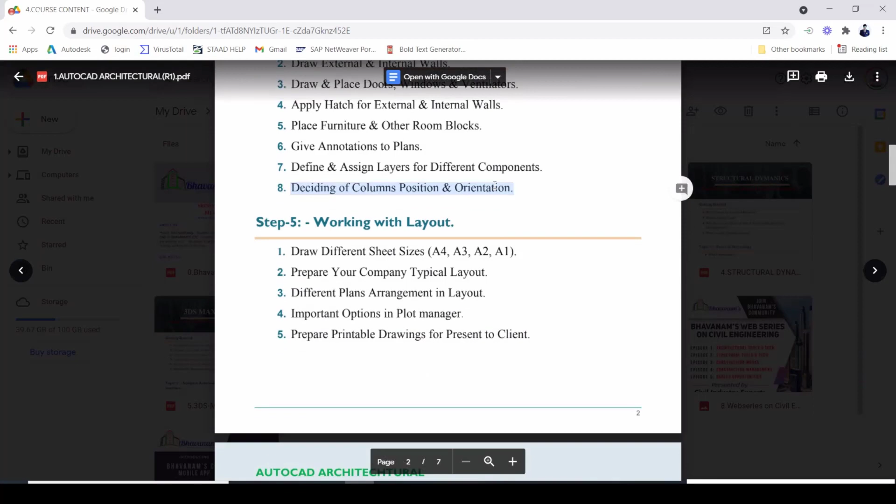I hope you all think this is not an architectural perspective - but definitely it is an architectural perspective. We need the architect to initially decide where the structural engineer needs to place the column. Once the structural engineer takes the project, they will go on to work and decide, is this the correct place or can I change it? So ultimately, it depends upon the structural engineering background.

Once you come to any changes as per the architectural design, the architect and structural engineer need to talk. After that they will decide together. For example, in the architectural point of view, there is some parking so I can't place a column there, that's why I remove it. But the structural engineer will say, if we don't have a column here, there will be instability in the structural analysis, so I need to place it. By mutual understanding, they will decide it.

So let's come to working with the layout. Drawing is important, but presentation is also important. How we can work with the layout, how we can draw different sheet sizes like A4, A3, A2 in AutoCAD, and prepare the company typical layout, and how we can draw on that company typical layout.

Different floor plan arrangements - in the layout we have a lot of work. How we can arrange the floor plans. If you have a G plus 9 stories building, you need to give the ground floor as 1, plus 1 for the typical floor, and give it as roof flat. So how we can arrange all these things, and the important options in the plot manager.

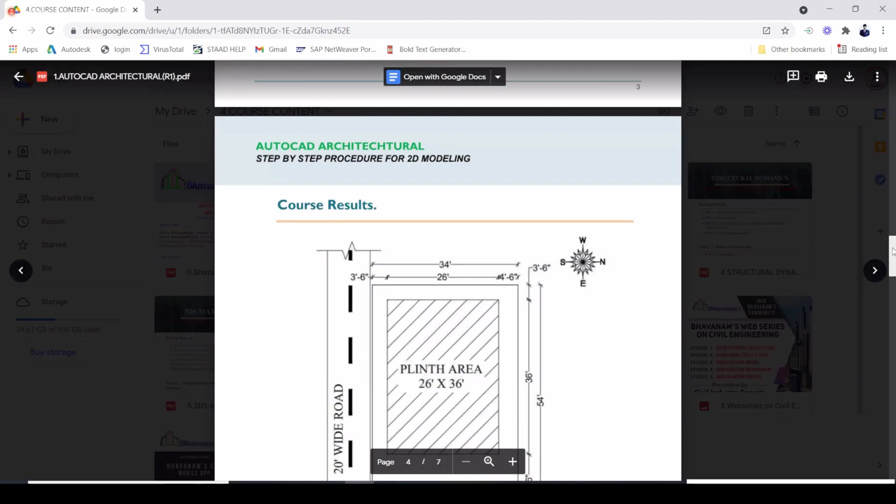We've already covered all these concepts. This is an entire 20-hour course. So let's come to the course outcomes. If you take this course, what is the outcome? What will you learn?

You will definitely learn how to draw a site layout. By adding your company's typical layout, you can give it to clients. This is a site layout, and as per the width, you need to consider how much setback to leave in all directions.

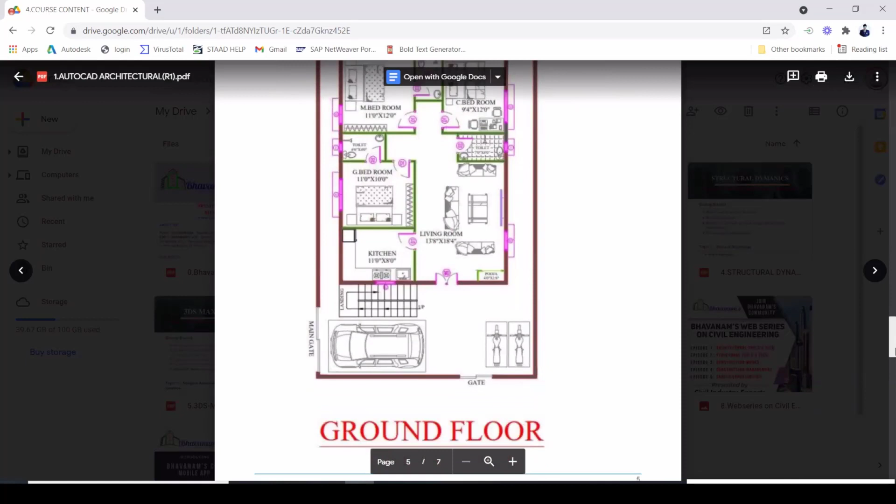Next is the ground floor plan, showing how to place the children's bedroom, master bedroom, and so on. We covered all this in the course outcome. Once you join the course, you'll learn how to draw the floor plan as per Vastu and government rules. Then comes the first floor, where nothing much changes except corridors and balconies are added.